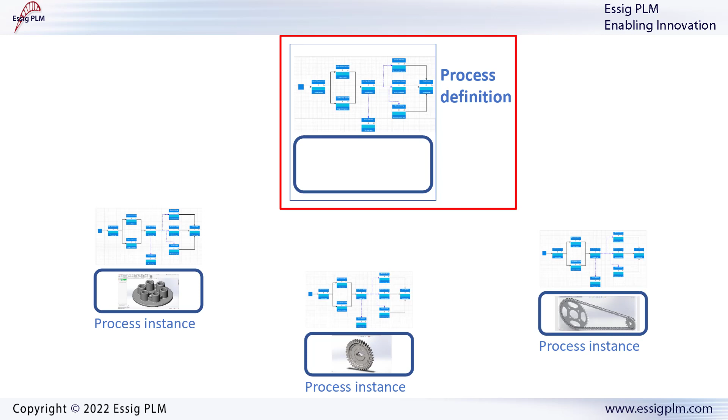Once a workflow has been built, you will have the possibility to create instances, that is, specific cases that follow the general picture of the workflow but that are guided by the parameters related to a particular use case. This is similar to classes and class instances of the object-oriented programming paradigm. In this video we will make clear whether we are talking of one or the other. When we are building a workflow, we do not refer to the instance but to the general case, which we also call process definition. The end users instead interact with workflow instances.

Only those users with the right permissions can see the Administration tab in Nexa. When I click on the Workflow Processes entry, I see all the existing processes and related information, like for example the existing instances of the workflow. There are two kinds of activities, the process start activity and the regular activities. Here we see a workflow where there is a square icon that represents the process start activity.

With a single click, I can select the icon or move it around by keeping the button pressed. By double-clicking it, we are redirected to its configuration window. We can see that there are four tabs: General, Branch Rules, Operations, and Permissions. In the General tab, there are the main parameters that define the workflow, like its name. Please remember that each workflow needs a name, otherwise Nexa will not let you save it. Although the description is optional, it is highly recommended to write the notes that allow you to remember at a glance the purpose of the workflow.

A single person can become the coordinator of the workflow. A coordinator is a user who has special privileges on this specific workflow. He or she does not need to be a Nexa administrator. A workflow coordinator is responsible for dealing with activities related to specific instances, for example when they are placed on hold, or for cancelling or deleting workflow processes and reassigning activities. The role of an administrator instead is to deal with the process definition and does not need to deal with its instances. We cannot change the modified by entry since it is automatically filled in by Nexa with the name of the current user who is actually modifying the workflow.

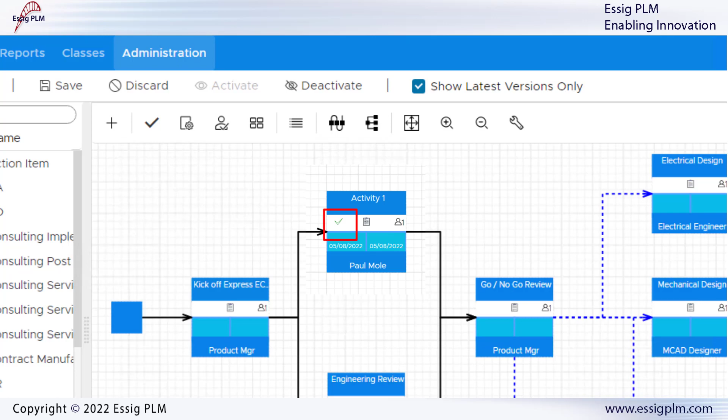No icon is shown for those activities that have not yet started. If the activity has already started but has not yet been completed, at the left-hand side of the white part there is a small hourglass icon. In the light blue area on the left, we can see the date when the activity has been assigned. If it has been completed instead, there is a green tick mark. The completion date will appear on the right-hand side.

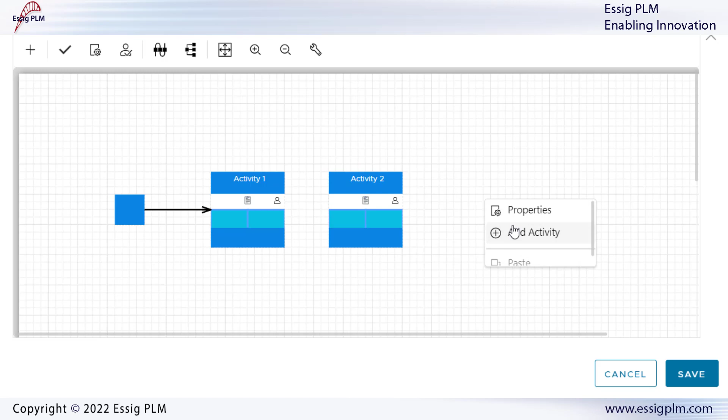Let's now inspect the details of a regular activity. We double-click on the activity. In this case, we see that there are 5 tabs: General, Assignments, Dependencies, Post-Operations, and Branch Rules. General. When you build a new activity, Nexa kindly provides you with a standard name, activity followed by an increasing integer. It is good practice to change it with a name that clarifies the aim of the activity.

The description area gives us space for a more extended clarification. It is also possible to enter the estimated duration of the activity expressed in days. Please remember that you cannot save your preferences yet, since each activity requires at least one assignee. We can set it by using the second tab, Assignments.

Once we click on it, we can see that we have 4 main options: user roles, users, group roles, and groups. When we click on one of these 4 options, Nexa shows us the list of people, groups, or role names. If we click on one of them and then press on the right arrow, we assign the person, group, or role to the activity. Users and groups are rather straightforward concepts, describing single individuals or groups of individuals within your company.

Roles are just labels that get specific values when the activity begins. We need these labels on top of the normal users and groups, because sometimes we want to assign an activity based on the actions performed during the workflow and not based on the company role.

A very clear example regards the system-defined role of preparer. This role is automatically filled by the preparer of the project or file attached to the process, no matter who this person is or which group he/she belongs to. Nexa proposes two system-defined roles: preparer, last user. However, the administrators can decide to build new custom roles according to their needs.

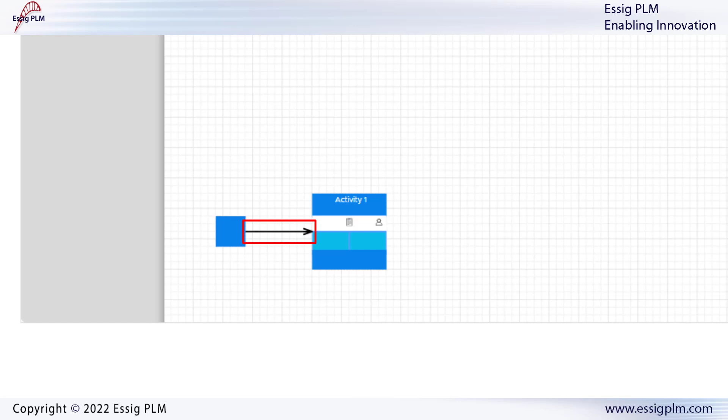We open the start activity and enter the workflow name, My First Workflow. We select the CMS Projects Engineering Projects class. Notice that this is a custom class we built. Please refer to the video dedicated to Nexa classes and forms for more insights.

No branch rules are available, simply because at the present stage of the workflow, there is only one successor of the start activity. We go to the last tab, Permissions, and select Global, so that all employees are going to be able to use the present workflow.

We click on OK. At this point, we need to customize the first activity. We change the name from Activity 1 to Send Forward, and fill out the instructions. We assign the activity to the MCAD group. We check the claimable flag, and press OK and Save.

At this point, when an instance of this workflow is built, every member of the MCAD group can claim the activity. Nexa asks us if we want to activate the process. When a process is inactive, you cannot issue its instances, so we activate it.

We can now create an instance of this workflow. We go to the Desktop tab. Please remember that the Desktop tab is just a space for the items you use more often. In this case, we see that it contains 3 objects, 2 parts and a JPEG image. Notice further that when we select the image, it becomes highlighted in blue.

Now we press on New Workflow. There are 2 options: create by routing selected items, or create by using a form. Each option shows a number of possible workflows. Since the one we built already has an associated class and thus a form, we select the second option. Among the workflows, we see My First Workflow and we press Create.

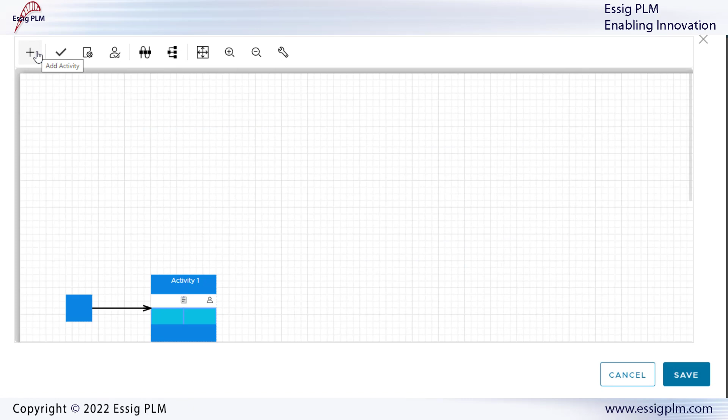Parallel activities. We are going to create a workflow where there are 3 activities occurring in parallel. We go to Administration, Workflows, and press the Add button. This opens the Visual Workflow Builder. At the top, there is a bar with 10 buttons.

The first one creates a new activity for the workflow. The second button checks the workflow, looking for missing mandatory parameters, loops, etc. The third one opens the properties of the currently selected activity.

If no activity is selected, it opens the properties of the process start. The fourth button opens the Assignment tab of the property window of the selected activity. In this way, we can quickly assign a resource to the activity.

The fifth button is a shortcut to build a collection of activities linked one after another. The sixth button is similar to the fifth but creates a set of parallel activities.

The seventh button fits the canvas where there is the workflow to show all the activities. The eighth and ninth button provide zoom in and out capabilities.

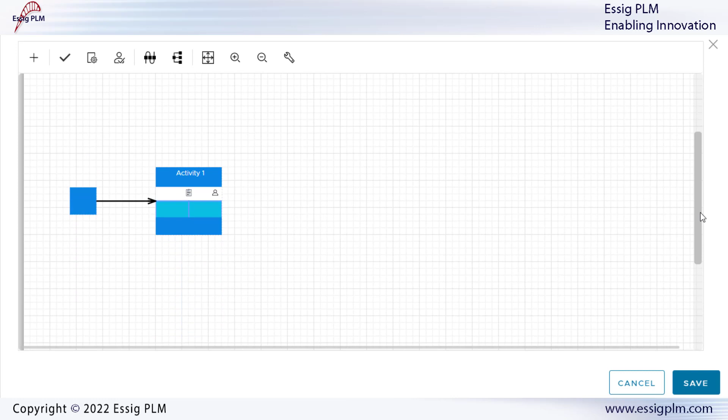The 10th button opens a secondary window with some useful buttons, including zoom fit, toggle grid on and off, full screen mode, etc. As usual, there is the process start connected to a normal activity.

We add 3 more activities and build the connections between them and the first activity. With this visual tool, it is clear that the first activity is followed by activities 2, 3, and 4.

Now we build a final activity and we connect the 3 parallel activities to it. We cannot save the process yet since a few mandatory ingredients are missing.

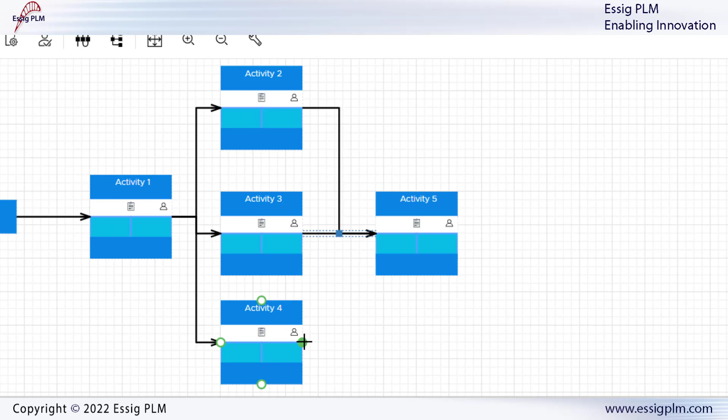For example, if we click on Validate Process, we know that we have not yet entered the name of the process, and this prevents us from being able to save.

Notice that the arrows that connect activity 1 with activities 2, 3 and 4 are black. A black arrow indicates that all the activities need to be performed. We will see in a minute that blue arrows have a different meaning.

Let's focus for a moment on activity 5, where the process ends. As we can see from the visual interface, there are 3 activities working concurrently that lead to activity 5. We thus need to specify under which conditions activity 5 should begin.

In order to decide that, we double-click on the activity and go to the Dependencies tab. At the top right of the window there are 2 choices: Merge All, Merge One. By default, the system selects Merge All.

This implies that activity 5 can begin only after the completion of all its predecessors. At variance, Merge One means that it is enough to complete one of the activities that lead to activity 5 to activate it. We select Merge One.

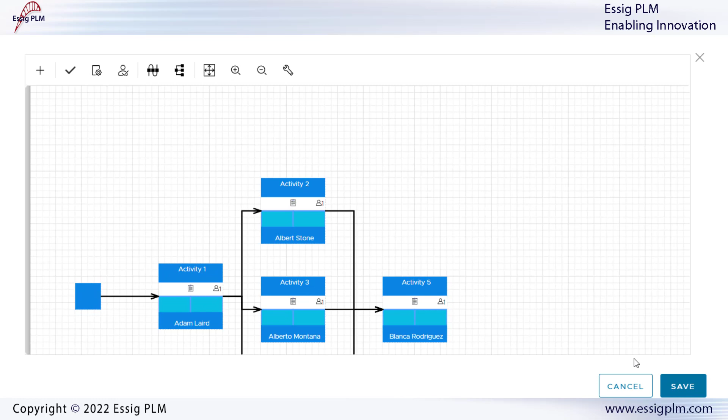Now we quickly proceed to fill all the mandatory fields of the workflow, including the name of the process and the assignees of all the activities. We then save and activate the process.

We did not assign any class to the process, so its instances will follow the properties of specific items in Nexa. We say that it is an item-based process.

We go to the desktop area in Nexa and we select a SOLIDWORKS part. We click on New Workflow.

We select Create by Routing Selected Item and we click on the workflow we have just built. A new process instance has been created.

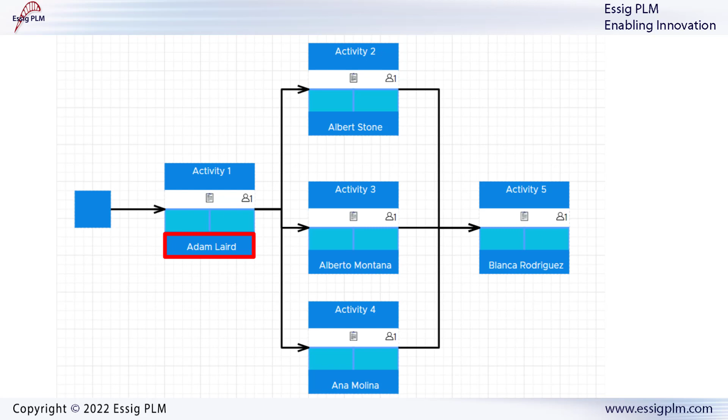We log in as Adam Laird since he is the assignee of the first activity, and we check his work list. As expected, we see an activity that is linked to the part we chose before.

We right-click on it. Let's suppose that Adam has performed the duties linked to the activity, like for example reading and approving a document, and we send it forward.

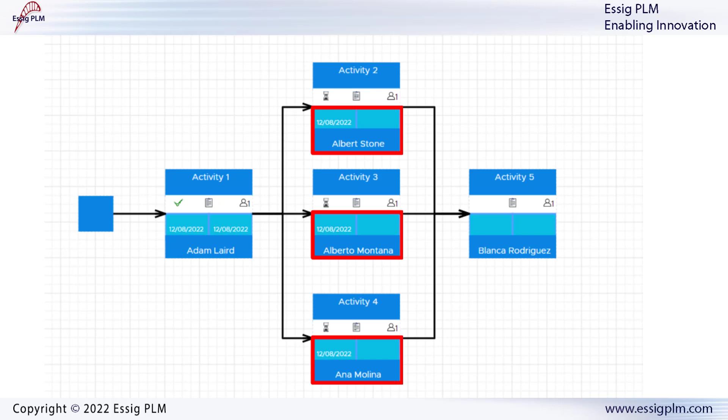At this point, 3 different users have been notified to perform an activity. They are associated with activities 2, 3 and 4. We log in as one of them, Ana Molina.

Remember that you can see the actual status of the whole workflow by right-clicking on the activity and selecting Process View. All 3 parallel activities are ready to be performed since we see the assignment date on the left-hand side of their icons.

The user Molina decides to send her activity forward. As soon as she has sent it forward, activity number 5, assigned to the user Rodriguez, becomes available to her and she can complete it.

This is because we chose Merge One on activity 5. Thus a single completed predecessor is enough to trigger it.

As we can see with the help of the process view, activities number 2 and 3 have not yet been completed. This is exactly how the Merge One dependency for activity 5 works.

Here's an important piece of information you should be aware of. A Merge One defines only the starting condition for the activity. All the remaining parallel predecessors still need to be completed for the whole process to be considered finished.

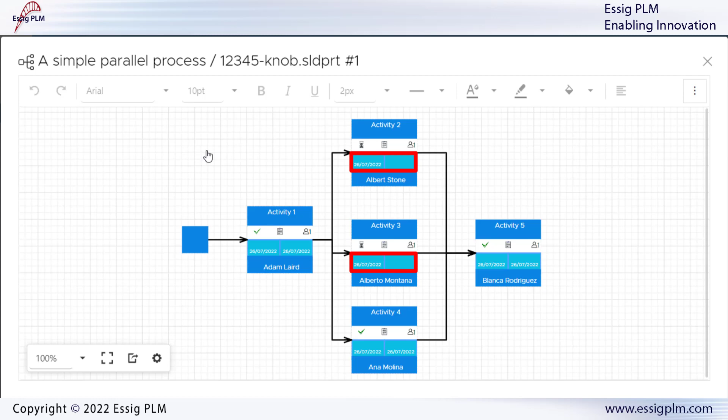As a test, we log in as an administrator and we see that there is no finish date. It will appear as soon as all the other parallel activities are sent forward. The process viewer confirms this, since we see that activities 2 and 3 have an assigned date, meaning they require to be carried out before the whole process can be considered complete.

Branch rules. If one wants to create a workflow where only some activities need to be performed depending on the decisions of the assignees, it is important to use branch rules. Given one activity with many successors, branch rules allow one to set the conditions that decide which of these successors are activated. The high customizability of Nexa allows you to set branch rules that activate just one successor, more than one, or even all of them.

All workflows come with a set of properties. This is because we can assign a class to a process or route it on an existing item stored in Nexa. In the first case, the properties of the workflow are defined by the class. When the process is routed on an existing item, it becomes associated with the properties of that object. As a reminder, all objects in Nexa are associated to a class with specific properties. The branch rules can use these properties to redirect the activity flow into the desired directions.

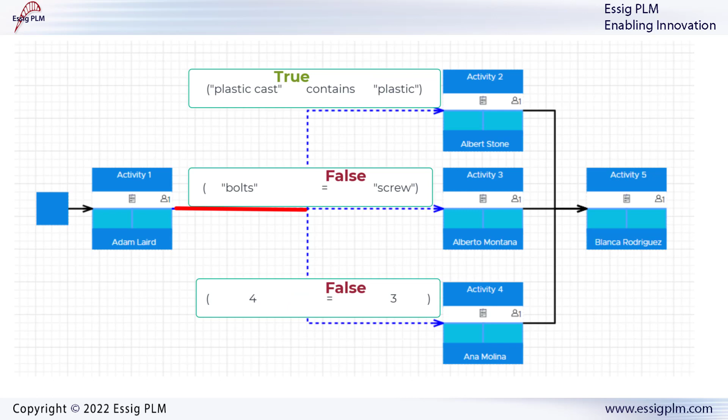Notice that branch rules are simple Boolean expressions that can be either true or false. The workflow designer builds the branch rules based on the properties of the workflow. If the values of the properties are such that the branch rule is true, at the time when the assignee sends the activity forward, its successor activity is activated. Otherwise, when the branch rule is false, Nexa does not activate the related activity for the current process.

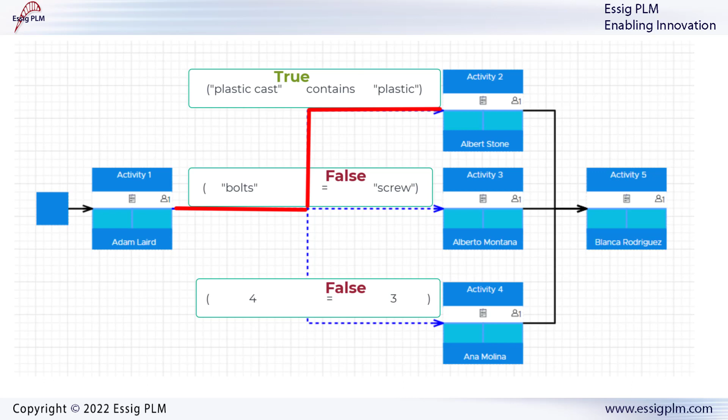To offer higher flexibility, Nexa provides special variables, such as the ID of the process, that can be used for the branch rules. These special variables can be found in the Branch Rules Syntax chapter of the Product Center Nexa Workflow Guide.

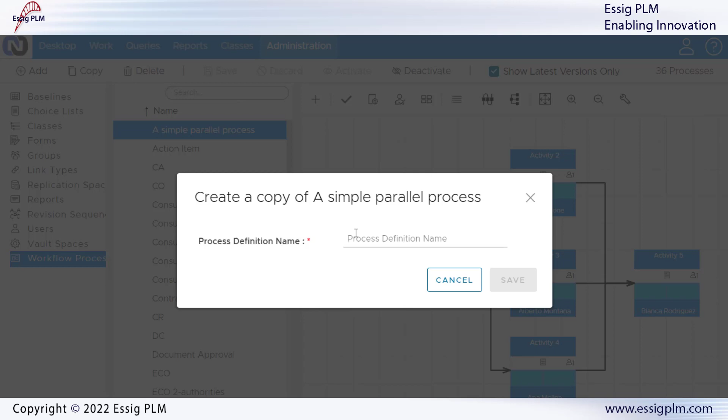We take as a starting point the parallel process we've just analyzed and duplicate it. We change its name to 'simple process with branch rules.' At this point, we modify the workflow. In particular, we associate it to a specific class, CMS Projects. When one instance of the workflow is created, Nexa builds a specific project object and attaches it to the instance.

As a result, the assignees of the activities with the right permissions will have access to the properties of a CMS project item through its form. Among the form properties, there is one called Description, where one can enter the description of the project. We now use the Description property to define how the workflow unfolds.

If the description is going to be exactly '3 and 4', then activities 3 and 4 are going to be undertaken. Otherwise, if we just enter the character '2' into the description, the system will route us to activity number 2. To do so, we enter the special variable item.description in the branch rules and set it equal to '3 and 4'.

This implies that Nexa will check the value of the description property of the current process instance. If the form description evaluates to '3 and 4', then the expression will turn true, allowing this branch to proceed.

One might wonder what happens when we enter a string that is neither '3 and 4' nor '2' in the description. This is not a problem, because when we define the branch rules, it is mandatory to select a default path that is followed when all the branch rules evaluate to false.

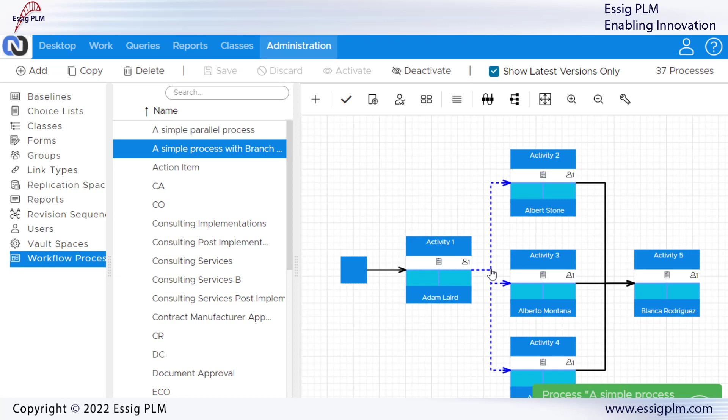As you can see, after setting the branch rules, the arrows that exit from the current activity have turned blue. This means that the successors are going to be active only when the branch rules are true. Remember that when we were building parallel activities in the previous example, all the arrows were black, meaning that all the successor activities had to be completed.

Let's create an instance of this process. We press on New Workflow and choose the new process we just built. We enter the mandatory blue fields, and this creates the new instance.

We now switch user. Adam Laird is responsible for the first activity. We select his work list and we see the process instance. Adam decides that the workflow should follow activities 3 and 4, while activity 2 should be skipped. He right-clicks on the process and selects Alter.

This opens the form associated to the CMS project class. He selects the description field, now empty, and types 3 and 4. Then he presses the Save button at the top right of the form. Before sending the activity forward, we check the process viewer and we see that only activity 1 has a starting date. All the others have not been unlocked yet.

Now he sends the activity forward. Please remember that you need to ensure that the user, in this case Adam Laird, has the right permissions to modify the form, otherwise he or she won't be able to change or even see the conditions leading to the branching. Let's open again the process viewer.

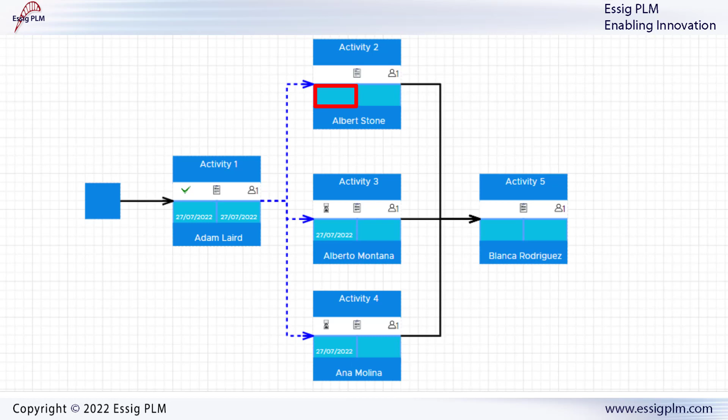We can see that the activities number 3 and 4 have a starting date, while activity number 2 does not. The branching has occurred exactly as expected. We can log in as the assignee of activity 4 and send it forward. At this point, the process viewer shows us that the final activity has been unlocked and can be performed.

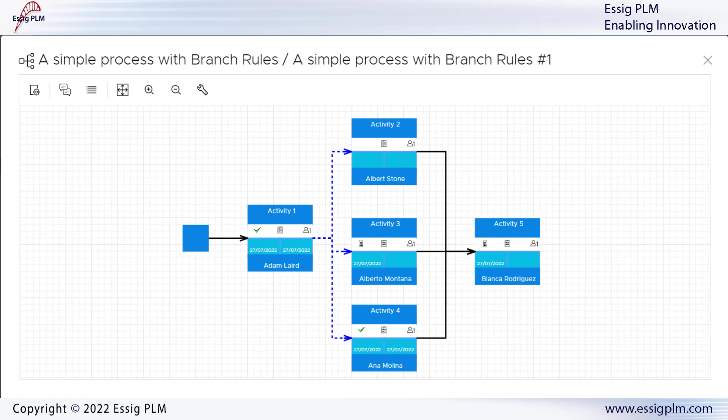Please remember that the activity 5 has been unlocked because in its dependencies we set merge 1, so it is enough that one of its predecessors becomes complete for activity 5 to start. However, to complete the whole process, all the active predecessor activities need to be done. Suppose that the assignees of the activities 3 and 5 send their activities forward.

The process is now terminated. As we can see, activity 2 has not been part of this instance due to the decision taken on the fly by the user Adam Laird during activity 1.

Operations. The operations are apps that perform activity-related work. These apps must be present on the Nexa server to be executed. It is good practice to test them before adding them to the process. The idea is that you might want something to happen when the process instance begins, or when it is completed, or at the end of an activity.

Please remember that you have complete freedom regarding the programming language of these apps or their behavior, as long as they can run on the Nexa server. This is because Nexa takes care of launching them under the right conditions. For example, you might want to write specific log files, copy files, send emails, etc.

There are 4 triggering conditions for the operations, 2 related to the process start activity and 2 related to the normal activities. The operations of the process start are the so-called pre-operations, triggered at the creation of the process instance, and post-operations, triggered at the completion of the process instance.

The other 2 conditions upon which an operation can be started are related to the normal activities. They are both triggered after the activity has been executed, but you can configure different behaviors depending on whether the assignee decides to click on Send Forward or Send Backward. Apart from the triggering contingencies, all these operations work in the same way.

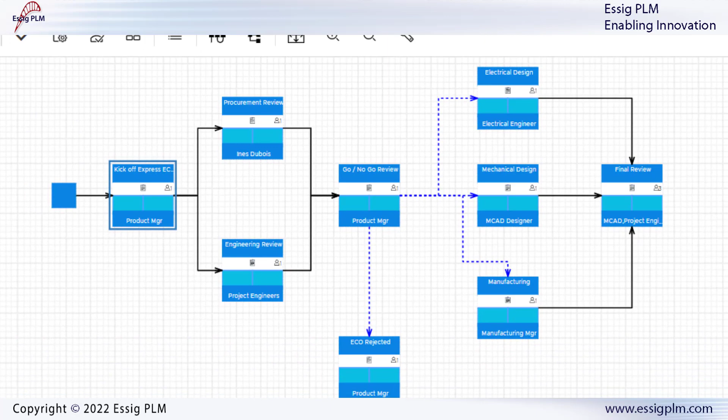We check the go-no-go activity, where we see that there is a merge all for the predecessors. Both of the initial reviewers must have finished their job. The go-no-go activity can give rise to a continuation or a termination of the process.

If the product manager decides that the ECO should continue, he or she can indicate in the description of the assembly the names of the design authorities. As a result, they are going to receive an automatic notification email as shown in the post operations. Or he/she can specify, for example, this piece of information through a drop-down menu in the process form.

We notice that the exiting arrows are blue. This means that a subset of the following activities is going to be performed and not all of them. Finally, when the designers have completed their job, the panel composed of 3 authorities is going to review the changes and decide whether to send their activities forward or ask for more work.

Now you have a good understanding of the Nexa workflow functionalities. You will be able to build any process needed by your company. The workflow will allow you to automate the flow of information and to keep detailed reports on the activities performed.